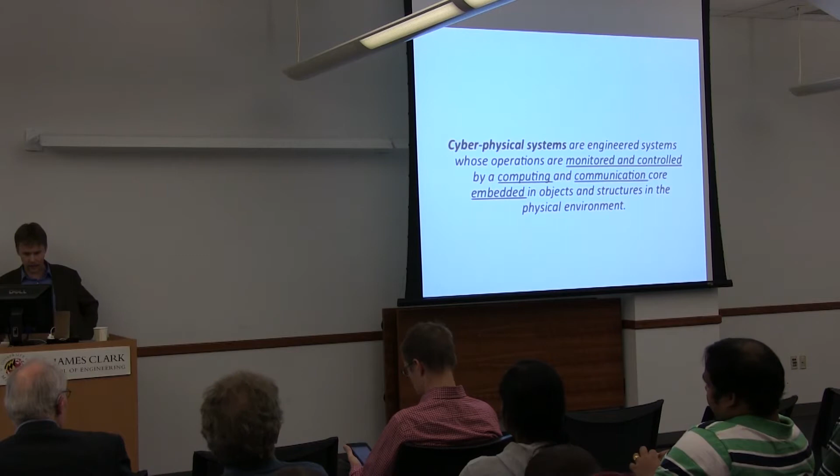When I talk about this in a more popular setting, I see it as a very natural development - coming from networking, over the sensor web, towards what some people call the action web, or CPS now. Some of the distinguishing features, I think, is that the systems we are looking into now involve infrastructures. We are not talking about small systems, we are talking about geographically large systems, closing the loop, but also the human - humans are very important in these systems.

As I said, I structure it into three parts. I will talk quite a bit on two case studies - one problem in goods transportation and one problem in building management. Then the last third will be on some cross-cutting challenges.

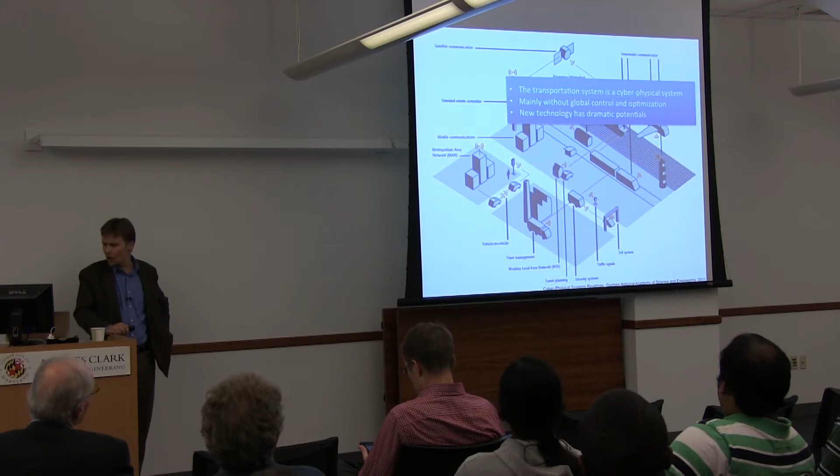But let's jump directly into goods transportation. The transportation network is a fantastic source of inspiration if you want to work on CPS, because it fulfills all these aspects of CPS. What is also excellent for research is that it's mainly without global control and optimization today - we run these systems more or less without any type of social optimum or anything like that. In addition, we have all these new technologies around that can make a dramatic potential.

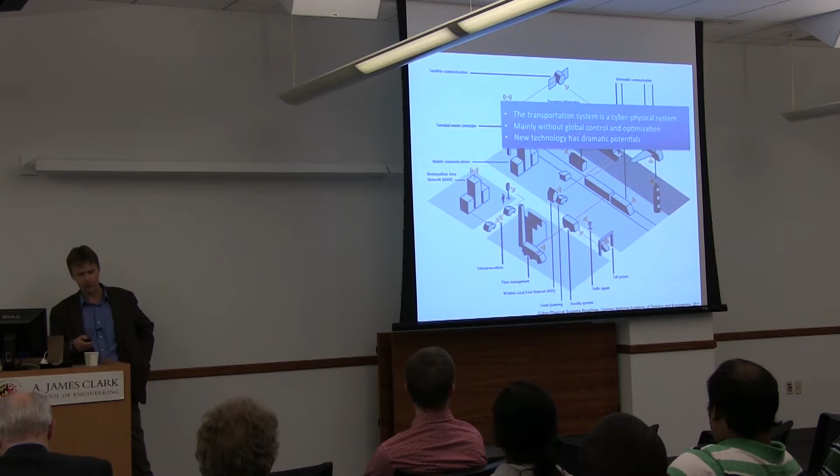But let's look not at transportation networks in general, but zoom in to goods transportation, and let's look at the demands from goods transportation. Goods transportation on the roads is actually very important for society, not only because it secures delivery and so on, but also because of pollution, for instance. As you see here, some figures about the development in goods transportation - 30% of CO2 emissions, for instance, come from this area, and there are a lot of efforts in the world trying to make this type of transportation more green.

Another viewpoint is efficiency. The figure you see down there is from Dr. Ludanek, CTO of Scania, a truck manufacturer. When he told me these figures, I was quite surprised - 24% of long haulage trucks run empty. These are Scania figures, so I guess they are quite representative. 57% is the average load capacity. So there is a lot of waste of trucks going around, where we could use some better method to improve.

Another view of this problem is to look from the fleet owner viewpoint - the one who is delivering, who owns the trucks and delivers - what do they spend money on? You see that this is basically three things. The orange part is fuel - one third is fuel. The light blue is salary - one third is salary, and then the rest is one third.

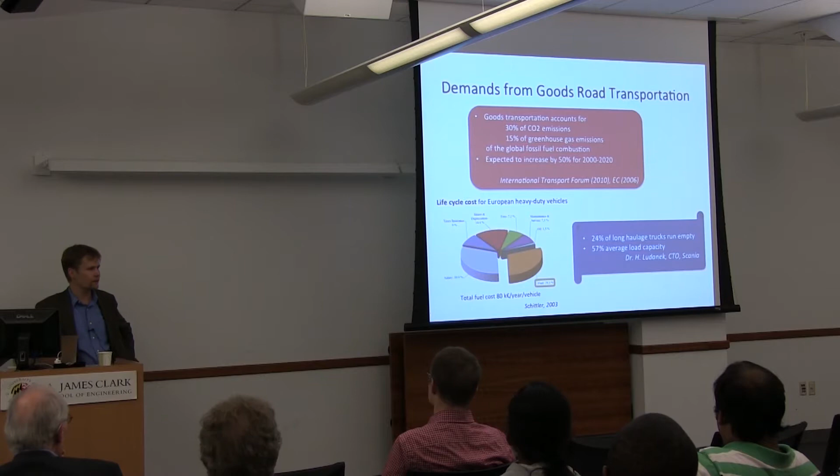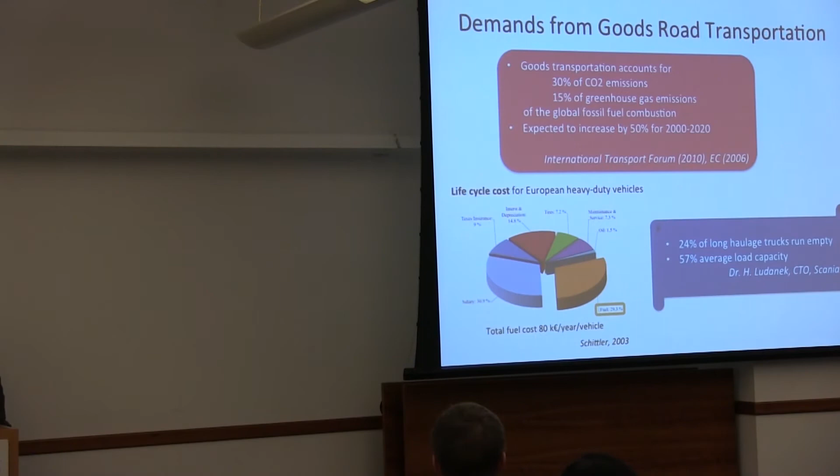This is now European figures, but I guess in the US it would probably be a bit similar. Notice that this is quite different than if you compare with cars. Fuel is not at all that important for cars, but for trucks that run 24/7, this is the fact. Fuel will be a smaller percentage in the US - it's more expensive in Europe, so the price is different.

So that was from the demand side. Let's look at the technology push - this is familiar to all of us. We have the sensor and communication technology now which is there. Today a modern truck has radar, cameras on board, vehicle-to-vehicle communication, and vehicle-to-infrastructure. All these things are more or less in place, but to what degree they are actually being integrated, used, and optimized - that's the second point, but the technology is there.

Another technology is real-time traffic information, right? This is also available to various degrees. We know what is happening on the road network. We don't use it today to optimize road transportation, but we know what's going on.

The third component here, which I would like to spend quite some time talking about, is vehicle platooning. This is something where, if you look at the control area, the first papers were written in the 60s about this. It's only recently that truck manufacturers have really taken this to implementation, and we are one of those working with it - you see this as the Scania trucks, but basically all major truck manufacturers in the world today are working on this. So let's stay with platooning for a little while.

Why would we like to platoon? On this slide you see on the x-axis the relative distance between vehicles in the platoon, and on the y-axis the air drag reduction. If you look at the second truck, for instance, at a distance of about 10 meters from the first truck, it has an air drag reduction of about 40%. That's quite substantial. Unfortunately, 40% air drag reduction doesn't mean 40% fuel reduction, but it could mean something like 5-10% fuel reduction. That's enough to be interesting to investigate.

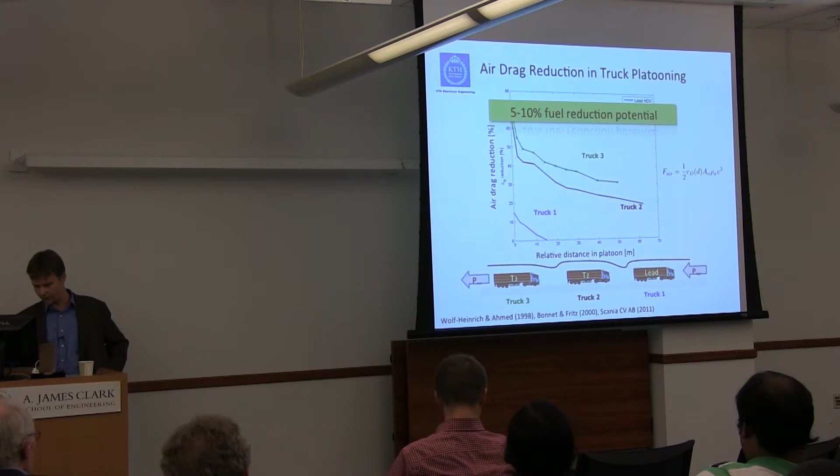So these three components I mentioned are there now. What could we use them for? Let's take a high-level look at this. We have Germany mapped here, so let's think about how we could optimize goods transportation. Goods transportation is moving goods now between these cities - what is the situation, roughly speaking?

In Europe we have 2 million long haulage trucks, in Germany 400,000. So it's basically a large distributed control system. We could think about that as more or less like a network flow problem, or an optimization problem, which is maybe not so interesting if we just solve it from scratch, because we could not start from scratch here - the situation is that we already have these 2 million trucks. So we need to come up with techniques which allow us to optimize, but don't do too much harm - don't completely change the way we are running the systems.

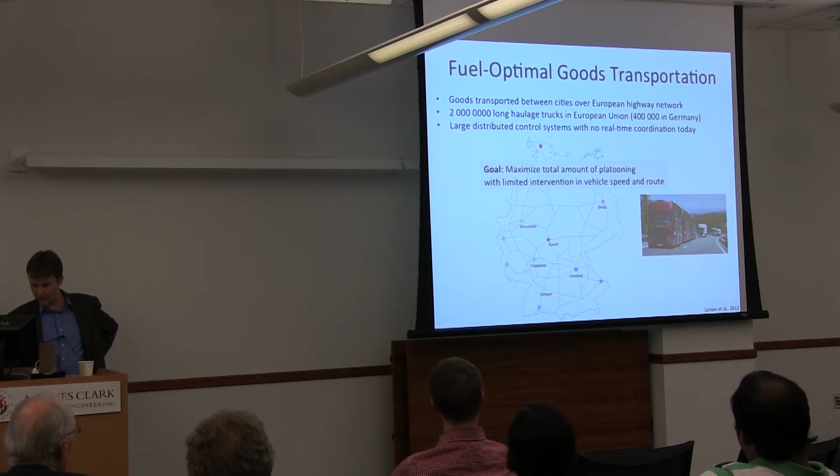So this vague goal I put up here, and I will discuss a little bit around that: how do we maximize the total amount of platooning but still limit the intervention we make now in the transportation that is going on? If you were to solve this problem, you might come up with something like I'd like to show next - some sort of functional architecture for how to solve that problem with these components I talked about.

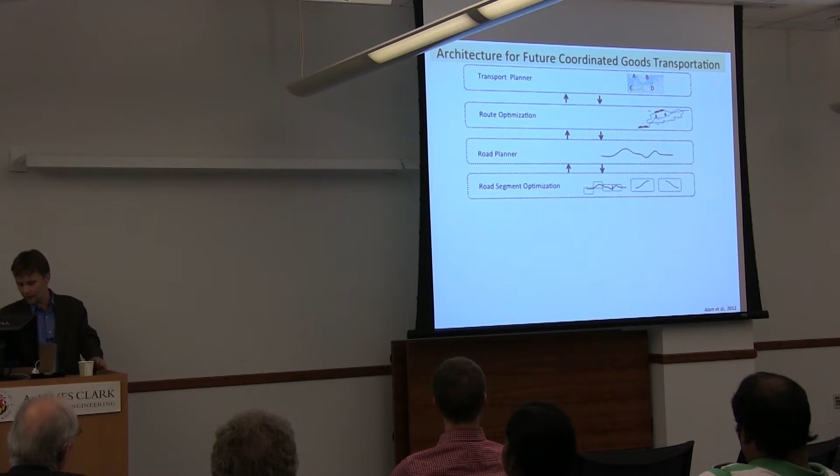When we've solved these problems from the top down, we come to the level of individual platoons, how they are formed, how they are split, how they interact with other traffic, and so on. Coming down one level further, what we need is to control a single platoon in real time. The last layer is then how we control the individual vehicle.

Now there's an interesting difference if you compare this work with the PATH project in California in the 80s and 90s. The implementation here is within the advanced cruise controller. Think about how the cruise control in a truck is already quite advanced today - you set a distance to the car in front of you, and you have a radar that regulates and measures the distance, etc.

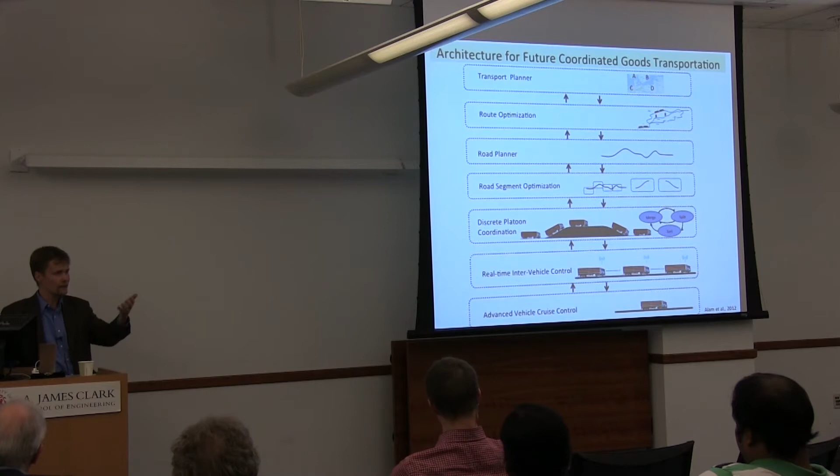So here you would imagine an interface where the driver can swap and shift to some sort of platooning mode, and then there's some automatic execution going on. This is, for legal and other reasons, an important aspect of these systems.

Let's now look a bit at what we've been doing, and I'll do some snapshots in this architecture of solutions to the problem, starting from the bottom. If we are to drive a single truck in a fuel-optimal way, how should we do that?

The first thing we can prove from optimal control technique is that if we're on a flat road, we should just go at constant speed - we shouldn't do anything. So the interesting thing is what it looks like in the picture here. We need to know the road ahead of us, the road grade and so on, and then we can adjust the driving according to that.

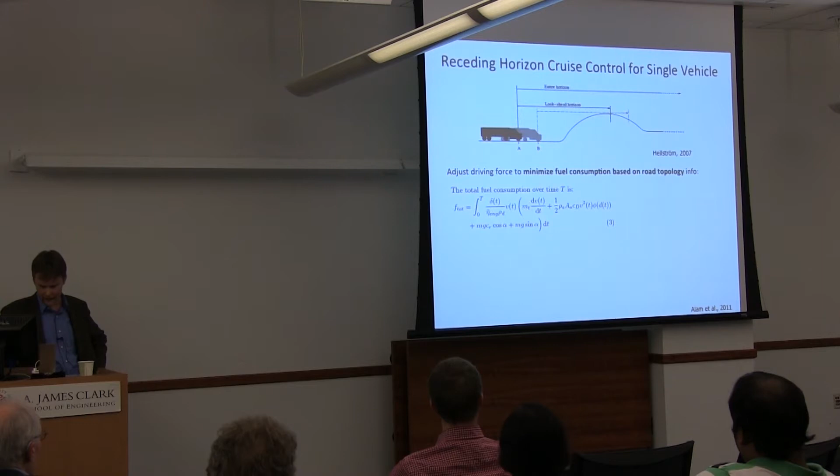We formulate some sort of a cost function which is basically fuel cost - what the fuel cost would be for a single vehicle, which depends on the alpha, the road grade, the air drag, etc. Then we have the dynamics, which we just get from Newton's laws of physics, and you see again that it's very basic.

We have the drivetrain, which gives us some force, F engine. We have the braking force, FB. We have the air drag, FAD. We have the rolling resistance, FR, and we have the gravity, FG.

What makes this problem interesting for a truck but not for a car is that the truck could weigh 60 tons or so, which means that when going uphill compared to flat, the forces acting against us switch from being air drag and rolling resistance to being gravity. So we basically have a switch in this equation, and then we can solve the optimal control for that.

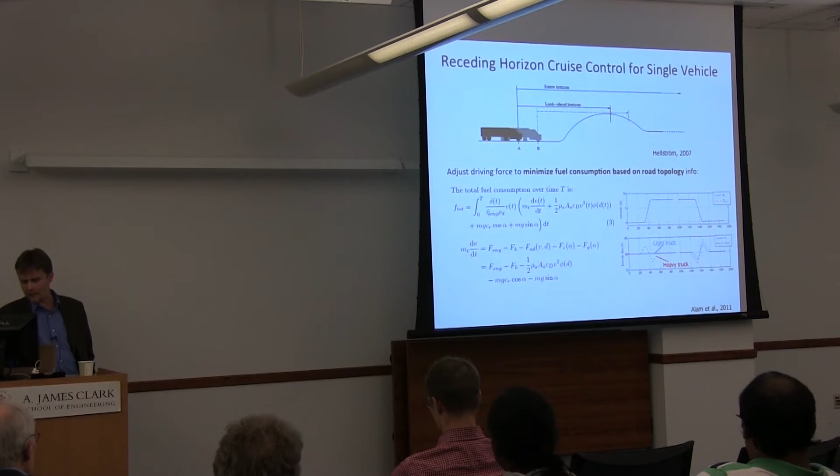This has been done and implemented - if you buy a Scania truck today, you can get this feature. Of course, they don't call it receding horizon control; they call it eco cruise control or something like that. The feature is also very reasonable for the driver, because if it's a light truck and not too steep, you just go at constant speed. But if it's a heavy truck, what happens is something drivers already do today - you speed up a little bit before going up the hill.

And then when you pass the hill, you then go a little bit slower. This is a very natural thing, but now you do it in an automatic way. And remember, everything here is implemented on the velocity reference, so it's implemented in the system as you would expect the cruise controller to do here.

There is something needed here which is not readily needed today. What is that? For this system to work, I cannot just implement it and run it like this. There is some piece of information missing in these equations. What is that, John?

No, there is no communication needed, but there is a variable here that is needed. What about the weight? No, the weight - today these trucks estimate their own weight continuously. They don't do it very well, but they have that estimate. Wind? No, wind is not it. Is there a car in front of the truck? No, but it's what I was talking about. It's alpha, the road grade. Oh, you said the grade, sorry. No, I didn't say it, but I was thinking it.

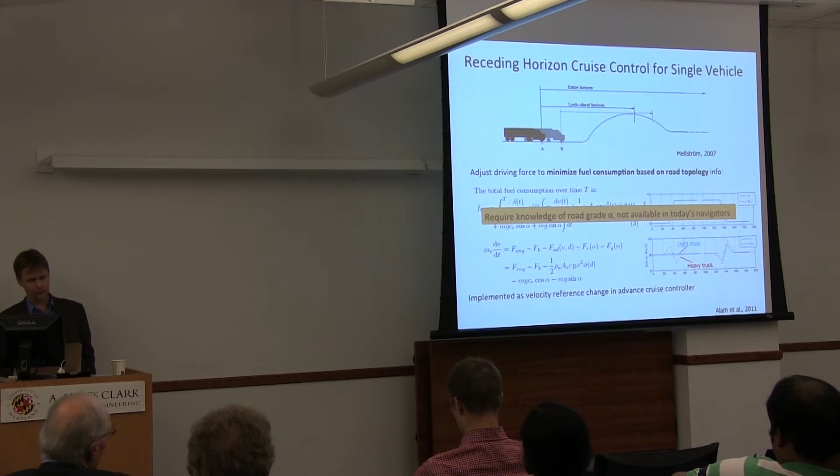So the road grade - if you think about your navigator, you don't get the road grade out there. There are companies like Navteq and others out there measuring road grade, probably in the US just like in Europe, and they sell that. When we worked on this project, we asked this question: why do you have to buy this thing? And could you actually get the road grade yourself?

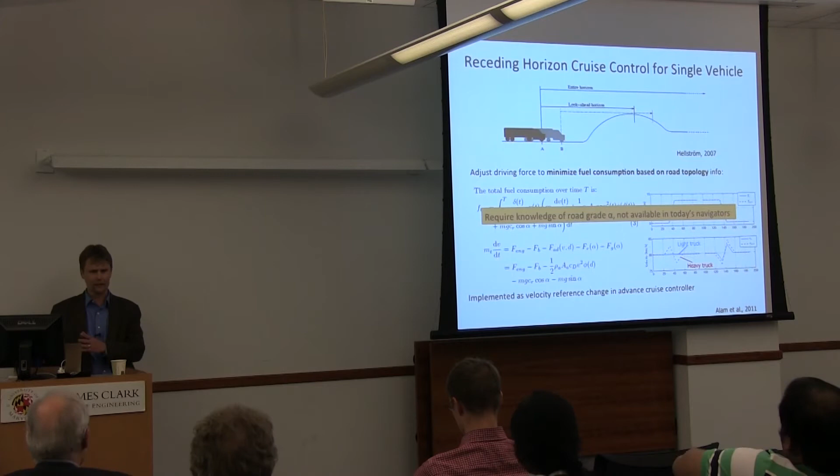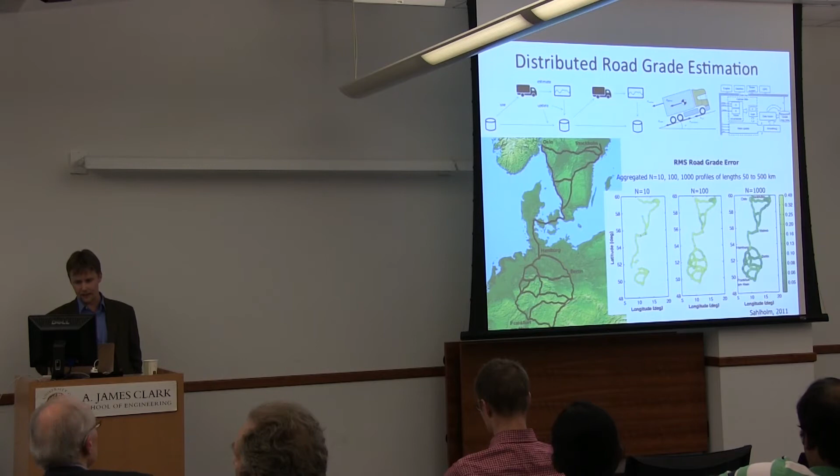So that was a little bit a separate thing, just to remember that we need the road grade. So if we have the road grade now, and we know how to plan this for a single truck, we need to also be able to do it for a platoon. Again, for the platoon, the difficulty is when we go up a hill, and this is a little bit more tricky. As far as I know, no one has found the truly optimal solution here.

Let me explain why it's difficult. As you see in these equations, the air drag depends on the relative distance to the vehicle ahead, and also to some extent to the vehicle behind. So think about an individual truck in this platoon - should it follow its own optimal trajectory, or should it stay close to the others? Or is there some sort of trade-off?

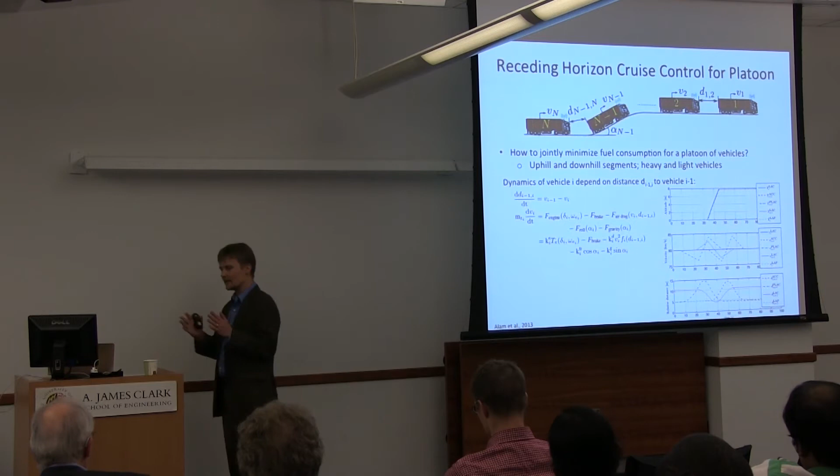We have been looking into this problem, and there are different solutions, different strategies you could say. Should you accelerate a little bit before? Should you allow the distance between vehicles to be smaller for some time and then increase again? Or should you try to make the distance bigger before the hill, and how should you do that? That's an interesting problem, and we have come up with some heuristics and run some tests, but in general, what is optimal here is not known.

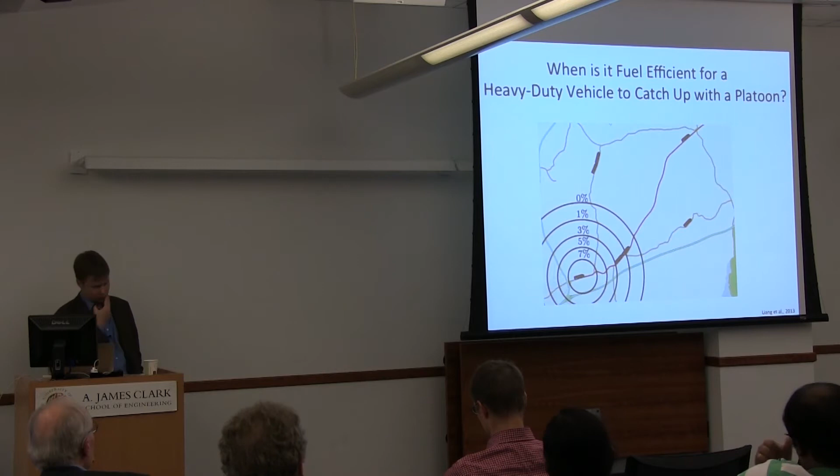Let's continue with another interesting problem: how to form the platoon. With this picture, we want to illustrate how an individual driver already out on the road might think. You could imagine that I think about who I should catch up with, and that would depend on where they are going and what distance they are from where I am. Everyone goes more or less the same velocity, but otherwise that would also be a parameter. You could imagine that you might benefit more if you catch a platoon that is closer rather than one that is further away.

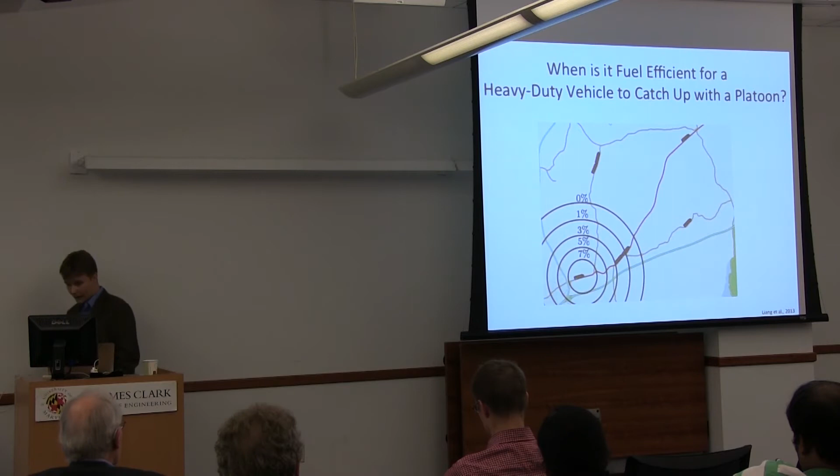Before talking more about the higher-level issue, I want to show a couple of brief movies to see how things are doing. There will be two different things: one will be how the communicator at Scania sees this, more like a professional production, and then I'll show some of our experiments. There is no sound, but it's just an illustration of this concept.

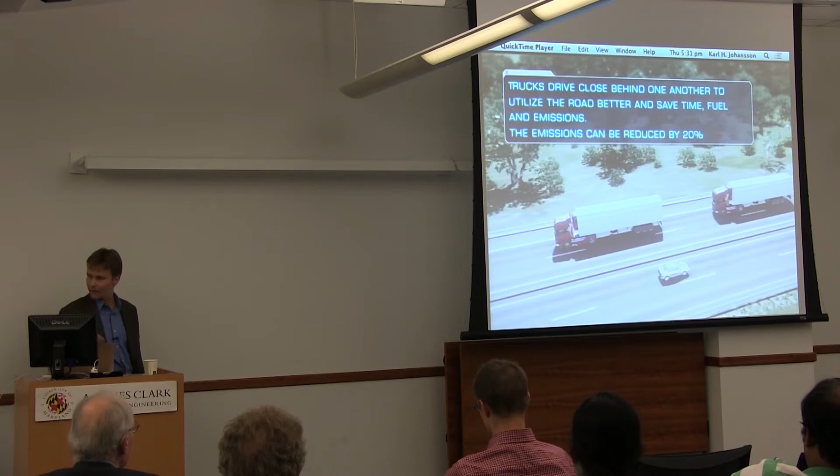So you have the trucks out there, and the trucks are forming these platoons as they go, communicating back and forth to keep that short distance I talked about. A question that comes up is what this distance should optimally be. We have some ideas about that, and we have run wind tunnel tests.

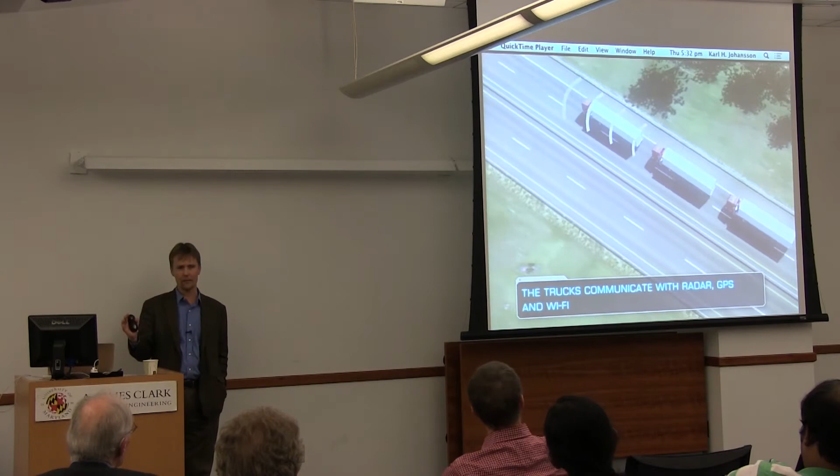Something important here is safety, and other drivers—this, I would say, is largely an unsolved problem so far. How to be able to do exactly what is happening there, or imagine it's not a car but a motorbike, and how should you detect this. There's another scenario when a truck will be leaving the platoon, but imagine also there's an on-ramp. This automatic lane change, where everyone follows automatically, is a quite challenging task to show in reality. This is somehow the view of what this system is supposed to be doing.

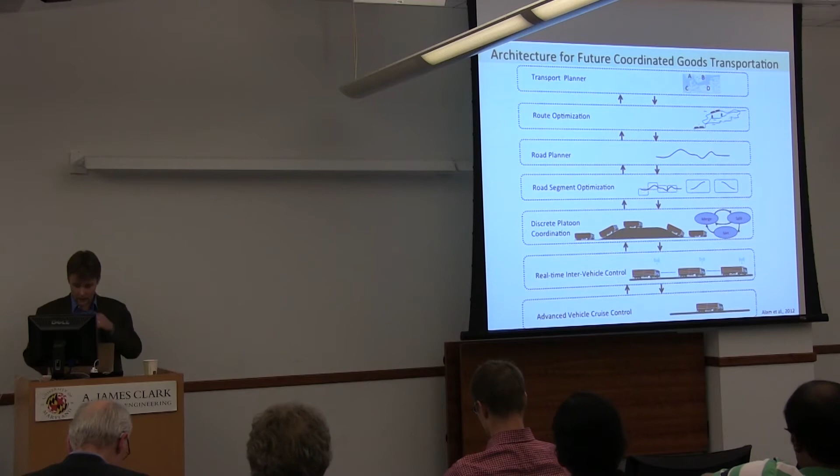Let's move up in this hierarchy now and come back to the high-level problem of optimizing goods transportation. We say we have this platooning technology in place. So basically what we can think about is a snapshot of Germany now, of the Autobahn system, with trucks around.

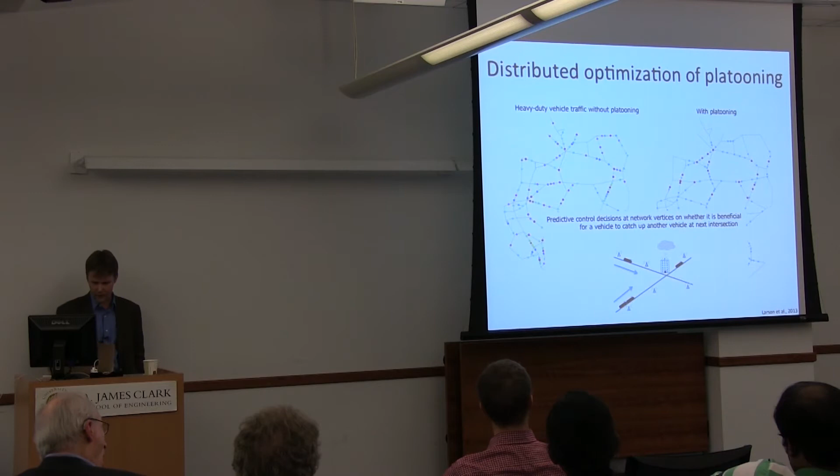One thing one could think about here is what if we took these trucks and while they are driving, we suggest that some should merge and go in platoons. So basically implement something like you see in this picture. We suggest intersection points where highways merge in order to optimize maximum platooning. In a particular situation you could end up with something like this, where some are platooning and some are not. And at each junction or intersection there needs to be some intelligence that predicts when a truck will be at this intersection, and who should speed up or slow down a little, because you cannot interfere much with the cruise controller in order to meet perfectly at these intersections.

So let's say we were doing this. Would this solve the problem? We showed some simulation and experimental data. First the simulation: let's say we take 300 trucks over Germany with random starting points and destinations in German cities, and run 500 experiments. How much would they save by platooning? Most of them, or the mean, is something like 2.2%. We assume that if they platoon, they save 10%, but on average there is a saving of only 2.2%. So not very much, but this was with 300 trucks.

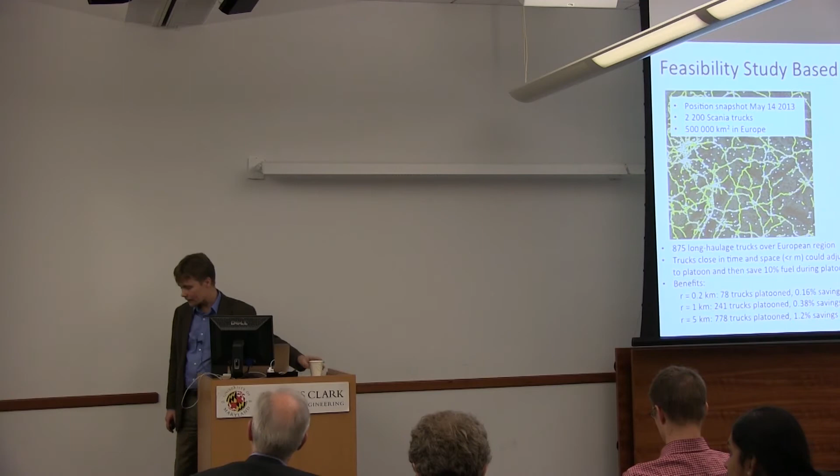Yeah, I think very much so. There's no details in this which had borrowed, I would say, from air traffic management or logistics. But there are definitely intersections on how problems are solved. I think maybe a difference I see is that in this business, even if truck manufacturing has a few big ones, and fleet owners, there are a few really big ones like DHL, Schneider, Schenker and so on, there's also a lot of those who have maybe 5 trucks, 10 trucks, 50 trucks, and they are very important in this picture, how to integrate them and how they would benefit from that system. So that might be different from air traffic, I think.

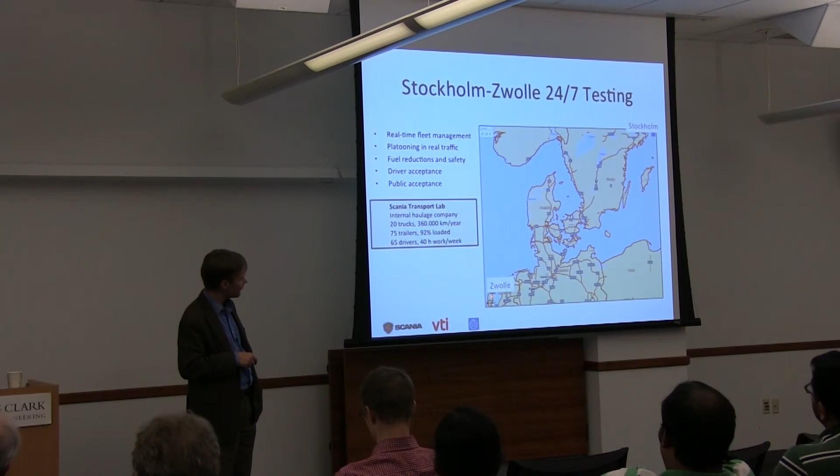Something on the other testing. So since a bit more than a year now, we are running tests between Stockholm and Zwolle, a city in Netherlands, running this 24/7 with truck drivers. So you see here there is something like 20 trucks and 65 truck drivers, also studying their experience of these systems and so on. I won't dwell into the results, but as you can imagine, some of this goes into the acceptance of the technology. This has also been covered in the news and so on.

Okay, so with that I would like to switch to, this was the first case study. I would like to switch to the second, while I understand it may be tough depending on how many questions John asks now in the next section. So let's talk about building management.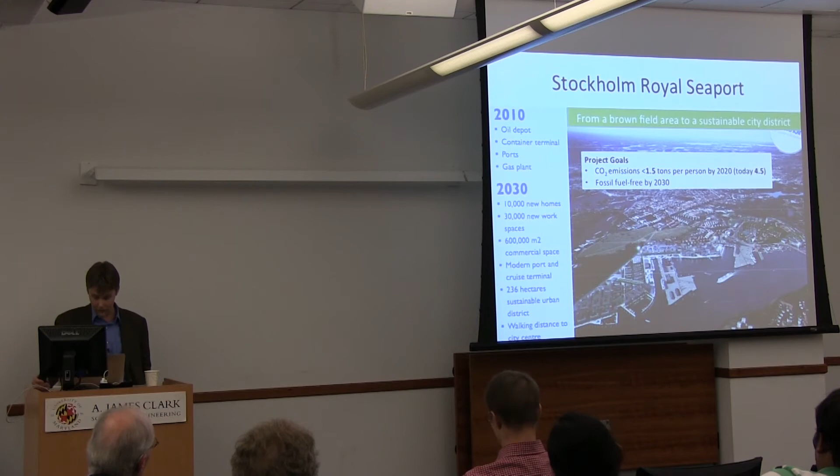If you are coming for the Nobel Prize, you don't get it there, but down there. But they have their building close to KTH. But this is not what I put in this picture. There is a sustainable city district being built, and people are moving in right now, which is called the Royal Seaport. And that is over here, where this picture shows a harbor, and this is what it's being turned into. And this is, we talked about Clinton's initiative earlier this morning. So this is part of this Clinton Green City initiative, and there's a lot of constraints on the CO2 emissions in this city. So we are involved in some projects related to this, of how to do more energy efficient buildings. And this picture about energy consumption, you are probably all familiar with, that buildings is a substantial part.

In Europe, 40% of total energy is used in buildings. And notice that 76% of building energy is for comfort. So it's a lot. Are we doing this the right way? There have been general studies showing that with information and communication technology we can improve this a lot, so there's a lot of potential here.

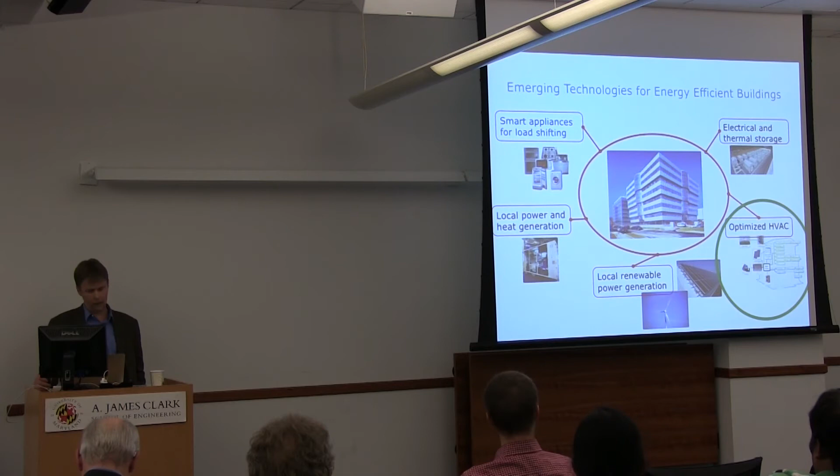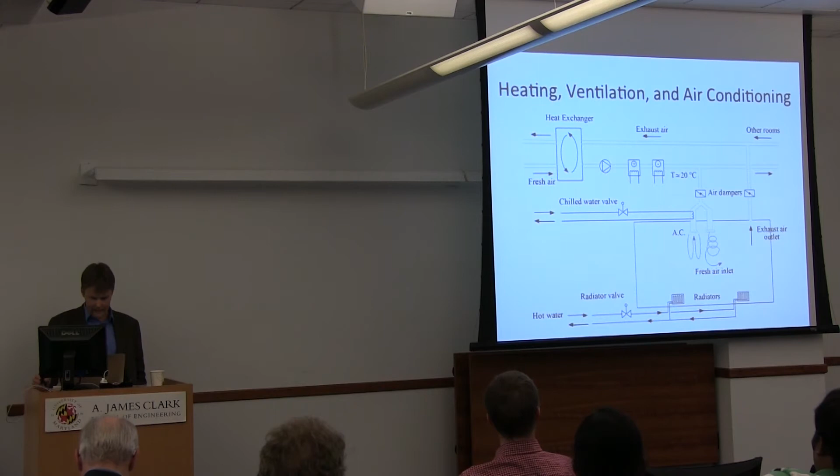When it comes to making buildings more efficient, there are different technologies being developed and different works going on. I want to focus on one piece we've been working on, which has to do with HVAC, optimizing the HVAC system. HVAC is heating, ventilation, and air conditioning. The classical control problem, you can say, is nothing but an optimal control problem: you want to reduce the energy used while keeping the building in good condition. Keeping good condition basically means keeping two variables within constraints: indoor temperature and air quality. So this is what we're dealing with here.

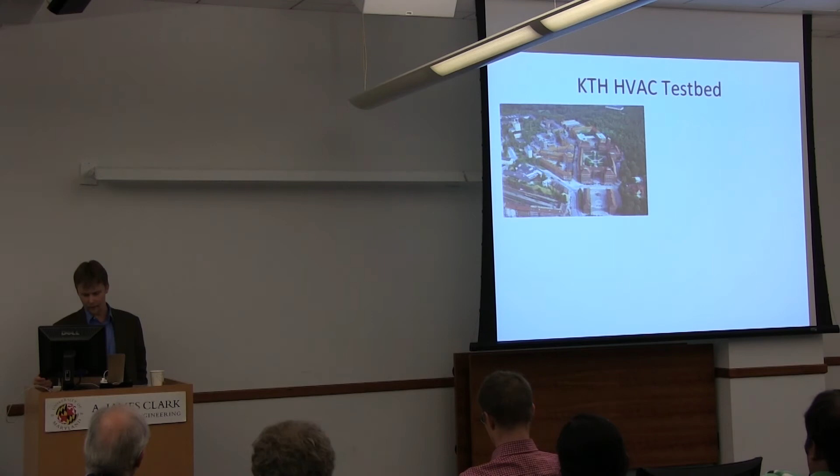We started working on this a few years back, and when we started, the first thing we realized is that we are inside a building. So we started to develop a test bed to understand this better. After quite some work, we got access to the whole SCADA system, the whole control system of the KTH campus. We have access to that in our system now, and we're located in the EE building, which looks like this.

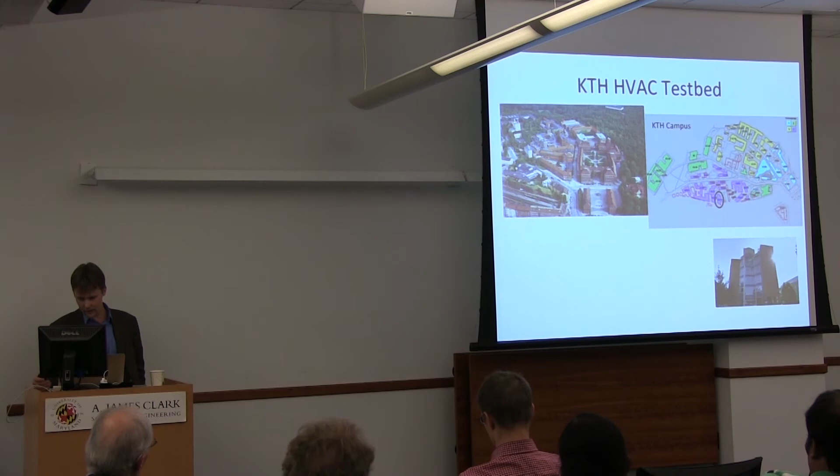In one of the floor plans there, we've worked a bit more actively in changing the system. This floor plan is a basement of the building where we have some labs, a lecture room, and so on. If we look inside one lab, it looks like this: you have a room there, and it's a student lab doing basic control courses with the double water tank processes and so on.

As I said, you have some actuators, which are the traditional ones. You have air coming in that is heated or cooled. You have hot water coming into the radiators. And you regulate also the fan speed, controlling what air comes in. And you have some sensors, the CO2 and temperature sensors.

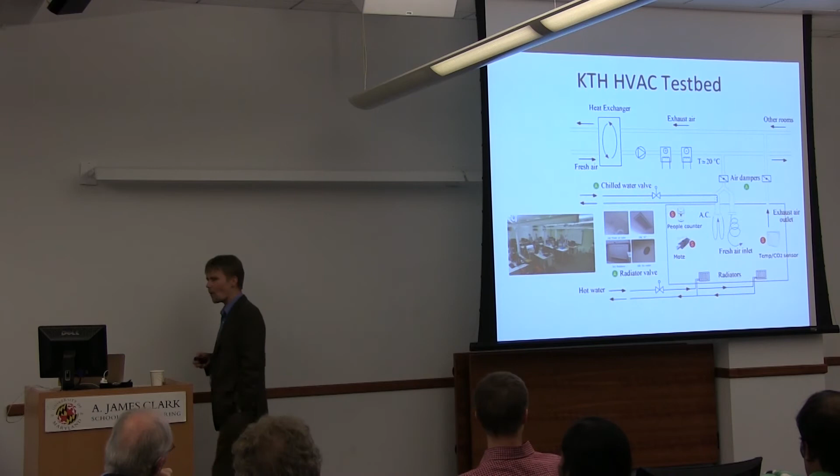But what we also did here is include some more sensing. The type of sensing we've included is like a people counter and so on, a weather station. But also thinking about information you can get from outside, like occupancy schedules and so on. So this is being integrated here.

Of all these things, the toughest has been the first line. We actually got a PLC integrated into the real system. It was not easy to get all the permissions, and I don't think we really have all the permissions, but anyhow, we have a system running there. It's actually available, so if you're bored by my talk now and you have a smartphone, you can go to this homepage and read online what's happening in this room right now.

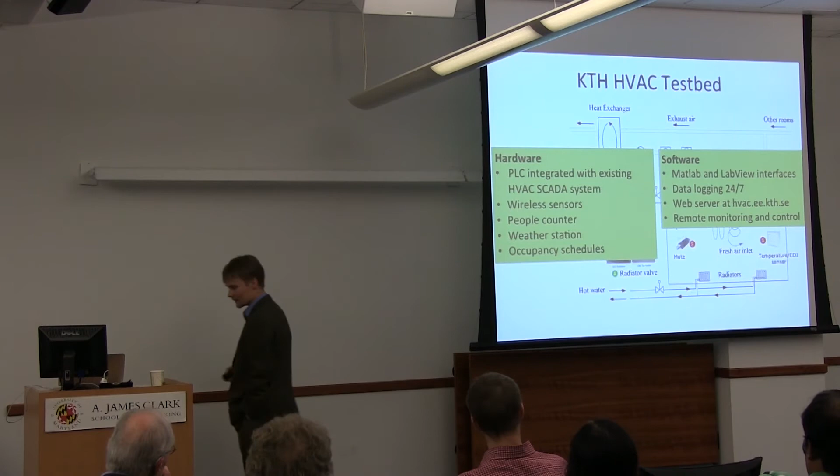I'd like to say something about the control we're developing here, and the control architecture. We've been developing a new control architecture for this HVAC system, which on the low level has the existing PI controllers. As I said, we're regulating the air flow, the supplied air temperature, and the temperature to the radiator — these are the control variables. We're measuring basically the CO2 concentration and room temperature.

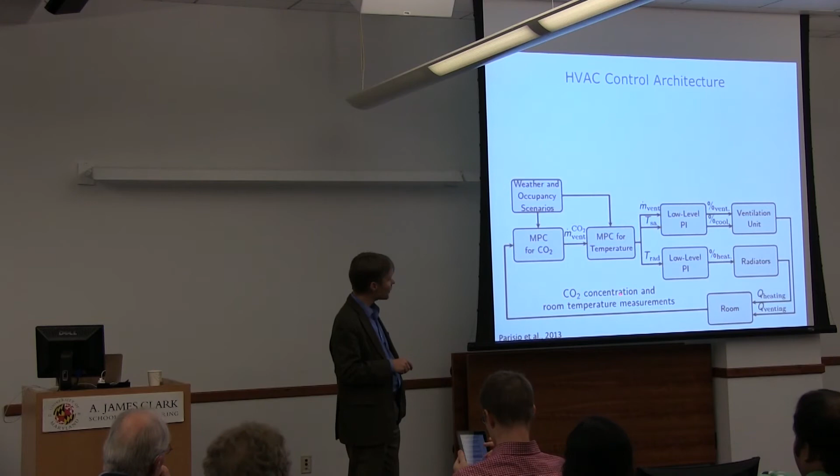What's new here now is this other type of information we get in, like the weather forecast and things like that. That comes in, and the way we integrate it is through scenarios — what we've been developing is scenario-based MPC. We basically have an architecture where, first of all, notice there are two different controllers here: the temperature controller acts on these variables, while the CO2 controller only provides a minimum airflow that is a constraint to the temperature controller. The CO2 is more like, we view it here, you can argue if this is the best way to do it, but we view it as a kind of minimum that you compute.

And then into these comes now the models that we have of the weather and the occupancy. I want to talk a little bit about how these are being integrated. Some of you have maybe seen this about scenario-based MPC, but if not, I will say a few words about that. But before that, let me just show you something which has been very important.

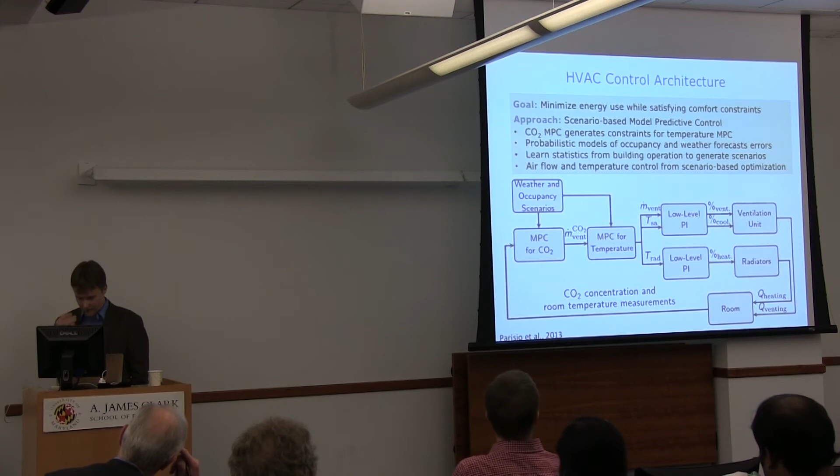Of course, to do the control, to design or tune this controller, models are very important. When I started this, I was a bit naive. I thought we go to a textbook on HVAC, write down the model, and that's it. But it's actually taken quite some time to get models on the level that we can use here. Of course, here it looks very simple, just linear models and so on. But these models that we derive are a mix of physics-based and system identification type models, right? Or gray box models, if you want.

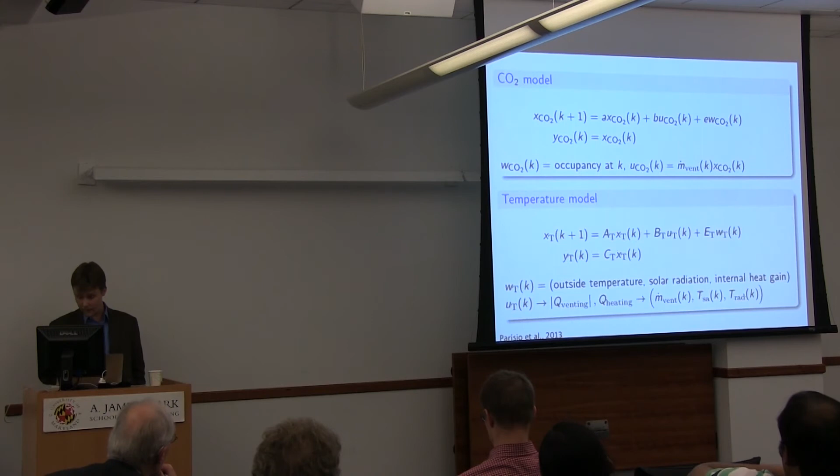The same with the temperature MPC. Similar, right? But different equations. In this case, it's thermal comfort. We should, with a certain probability, be within this range.

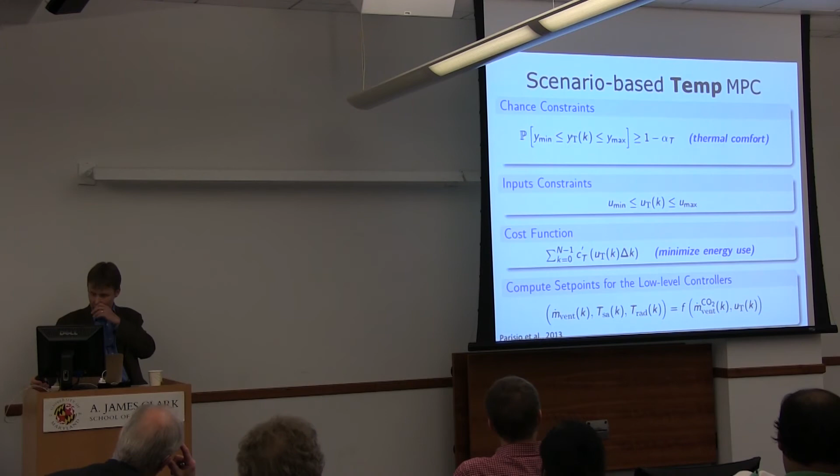So how do we now go from the chance constraints to the scenario-based MPC? One way could have been to stay in the stochastic world and do a stochastic MPC, but we don't do that. We do a robust approach instead. So we translate this chance constraint into deterministic constraints. And how do we do that?

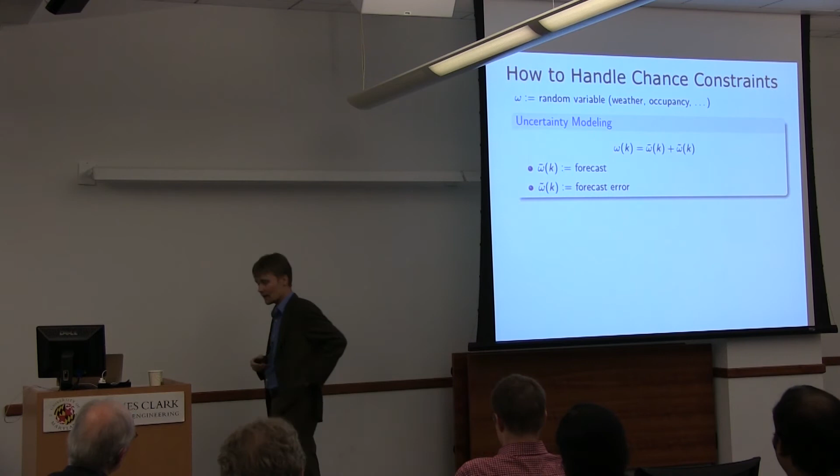The way we do it is that for one of these disturbances, let's say the weather, we see that the weather into the future has two pieces: one that we can forecast, and one which is a forecast error. With these types of things like weather, occupancy, and so on, assuming it's Gaussian is not a good model. So that's why we are using this approach. We try now to come up with other types of probabilistic description of this, which comes from, could be like a mix of Gaussians or other types of underlying probability model that could be learned during the operation of the buildings.

When we have that, we can generate scenarios, and there is also some theory developed by Campi and others of how many of these scenarios you need to put into your system to compute this robust controller, in order to guarantee with a certain probability that you satisfy these probabilistic constraints. So you see that in the end you get some sort of robust formulation of the MPC.

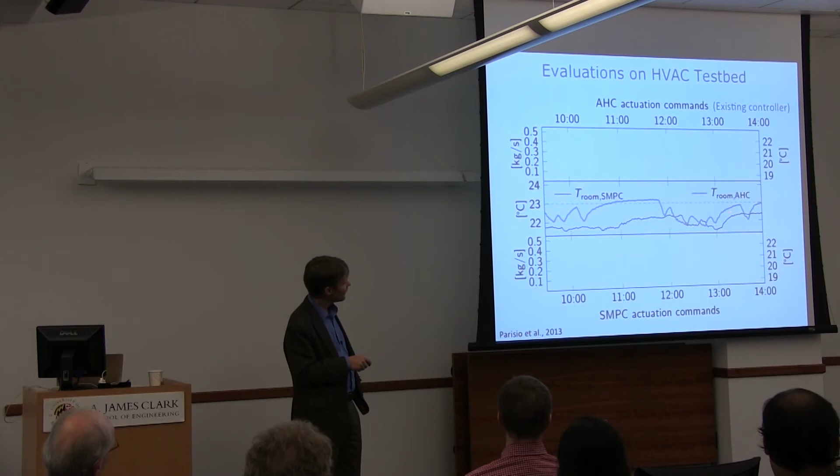So how well do these controllers do now? On the middle plot here, the gray line is the existing controller. The existing controller is able most of the time to keep it within the comfort range, which is 21 to 23 degrees here, but it exceeds at some point. And so the new controller here is doing a little bit better.

This is the control action, and there are two types of control action shown here. One is the supply air temperature, which varies here a little bit, and the other one is the airflow. You see the airflow is more or less bang-bang, right? Either it's on or it's off. It's not per se bang-bang, it's not a discrete variable, but this is the case here.

In our case, you can see that what the MPC is doing, what is a bit different here, is that it's more active on the temperature of the supply air. And this is what does the job.

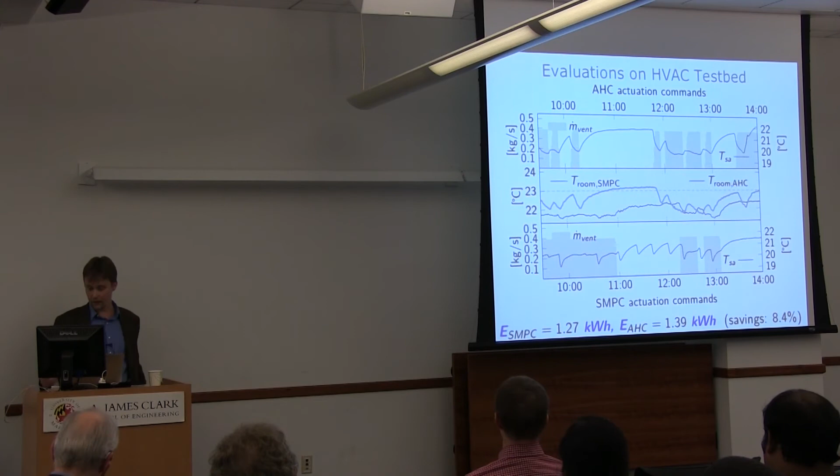So how much do we gain by this? We gain something like 8% better than the existing controller. If you look at the absolute number there, you would say, why caring? This is extremely small, right? But remember, we're talking about one room during 4 hours, a summer day in Stockholm. So I mean, this you should view on a bigger scale.

Okay, so that was what I would like to talk about in the building management. And for the last 10 minutes, I want to talk about some of the cross-cutting topics. You will see if you think it's cross-cutting or not. Okay, so let's go back to the cyber-physical here.

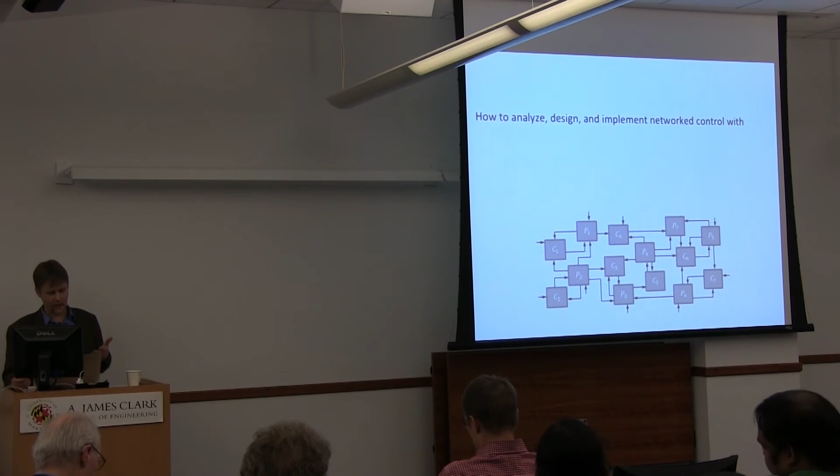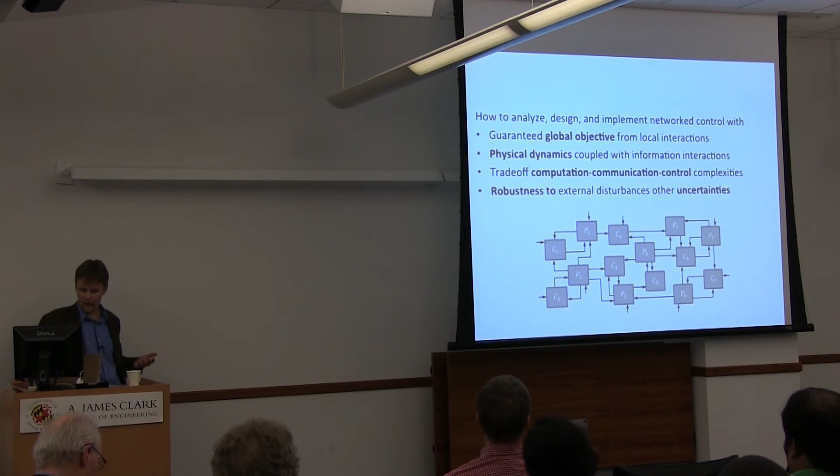In the control area that has been considered quite a bit, right? One type of problems, we sometimes draw a block diagram like the following, where we have a lot of different plants and a lot of different local controllers that are now controlling the system, and we ask ourselves, how can we develop control for these type of systems when we now have this type of demands on the global objective, on the dynamics, restrictions on what we can compute, what we can communicate, and so on.

A particular class of problems are the ones being dealt with in decentralized control. So in decentralized control, we focus into just saying that we have some plants given here. We know the dynamics of P. And then we will have a method to find out what are good Cs. And since 40, 50 years, people have studied that problem.

But I'm not going to talk about that problem. I'm going to talk about what I think has been studied too little. And that is that if we now think about that block diagram and relate it back to some of the applications I talked about, who gives me these P's, right? So the classical theory assumes that we have information about the P's, right?

And I argue that these are not so easy to get in general. It requires quite some effort, like that Rome example I showed you. So what if we should design, for instance, C1 in that picture only based on information about some of these P's? How should we be doing that?

Or if you want to ask that same question on the platooning example. So let's say that we have a three vehicle platoon here and we want to regulate the inter-vehicle distances. Should I now communicate the mass between the vehicles or not? How much benefit is it in communicating that?

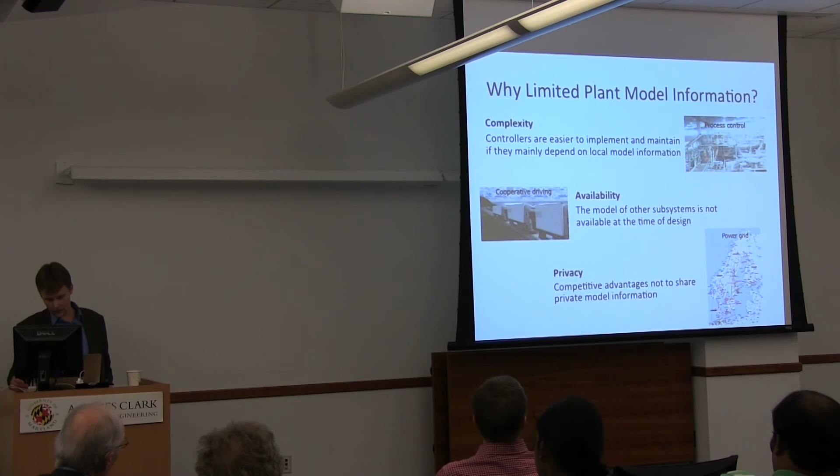So let's try to put this problem into a networked setting. With a network setting, I mean a traditional network control system where we have controllers K and plants P, which interact as I draw there with the arrows. I will use graphs now to show the links here.

So I have something I call the plant graph, which just shows what subsystems, what sub-Ps here, are interacting with which. I have a control graph which illustrates what the controllers can do and what information the controller has. And then I have the new thing, which is what I call the design graph.

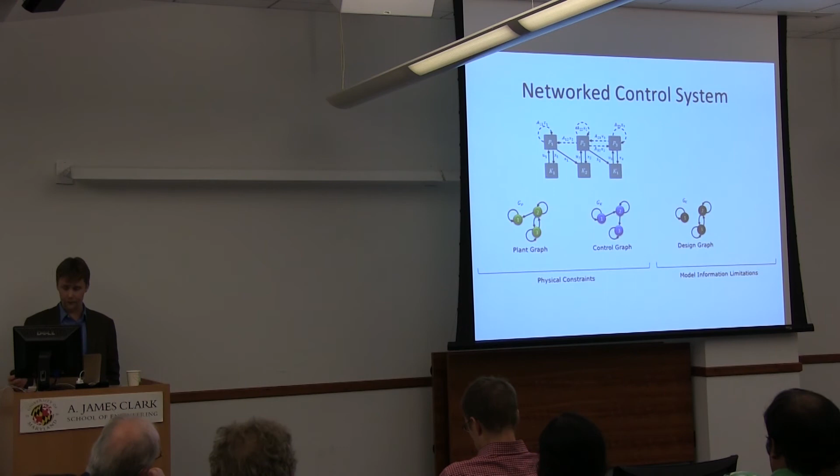So when I design each of these controllers, there could be different amounts of information available about the plant. Like in this picture, a self loop here means that when I design this controller, I have only information about P1, while for the others I could have more information. So this is what I mean by having these model information limitations.

So let's very quickly put some linear systems notation on this. We say now that P is given by a linear system, and that we have a structure given by that plant graph for the plant. That puts some structure, given by the adjacency matrix of that graph, on the A matrix of the overall dynamical system. And we have a B matrix that supports this.

Similarly, in what I'll show first here, we'll say that the controller is just a static state feedback controller. Again, the controller then has a structure given by the control graph, which gives some structure on that matrix K in the control. The design graph now—the design is a map from the parameters of the system, so from A and B, to a controller K. And the part of A and B you can use when you compute K is restricted by that design graph down there.

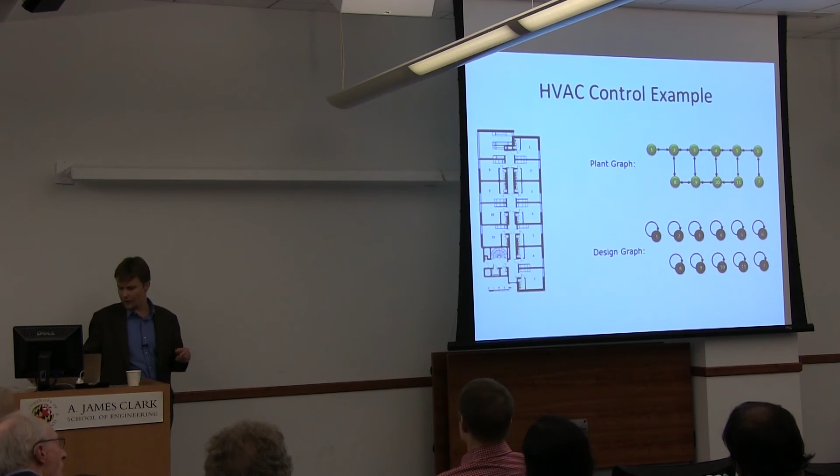So for instance, in this particular case, you see I would have a design graph which looks like this. Why would this be reasonable? If we look back on the HVAC example, you have a floor plan. You can imagine that the different rooms interact through the temperature with rooms next door, while in the design graph it could still be so that I design the local controllers only based on the information I have of the dynamics in that room.

How can we compare performance of different design strategies, or design methods gamma? We use the concept from computer science called the competitive ratio. I basically compute a cost J of this gamma of the design of A, B, and then take the supremum—the worst case of all the plants I have—so I get something there. Then I normalize that with the best possible thing I can do, the K star, and get a quota out, which I call R, the competitive ratio.

And then I do that for, in this case I have a linear system, I will do that for a quadratic cost, and I notice that if I have a complete graph, so I used state feedback where I used the full K here, then of course the best thing we can do up there would be the usual optimal LQ controller, right? So with that notation we have come up to a problem formulation.

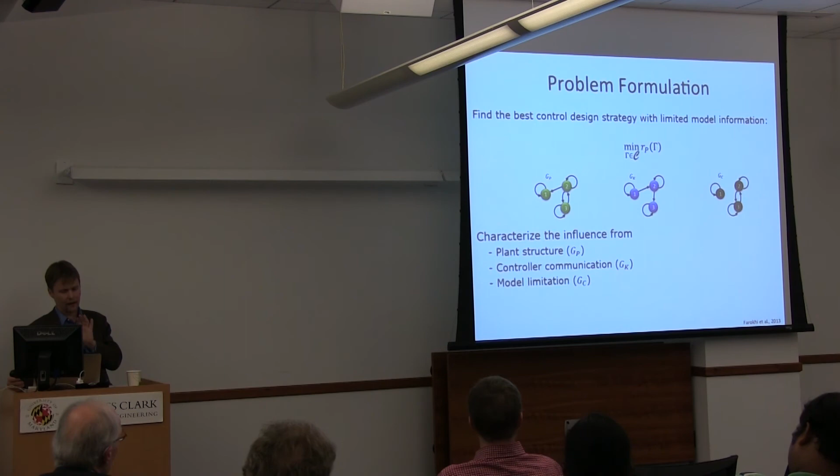So the problem I'm interested in here is now to find a good control strategy that minimizes this competitive ratio, given that we have structural information about the plant, about the controller, and about the information available. And I would like to understand how these different graphs play a role here.

There is some assumption in the result I'm going to show. The most important is the first one. The particular thing I'm showing here is for a fully actuated system, which is of course a strong limitation, that one can do some extensions here. Notice that the first example I showed you, that we came up with a deadbeat, and that deadbeat also fulfills this condition that I put on the design information.

And what is interesting in this network setting is the following result: the result of Langbort and Delvenne extends to this setting of networks if a condition is fulfilled, namely that the control graph needs to be a supergraph of the plant graph. What does that mean? It means that it has more edges than the plant graph, so in some sense it means there needs to be more communication in the controller than in the plant graph.

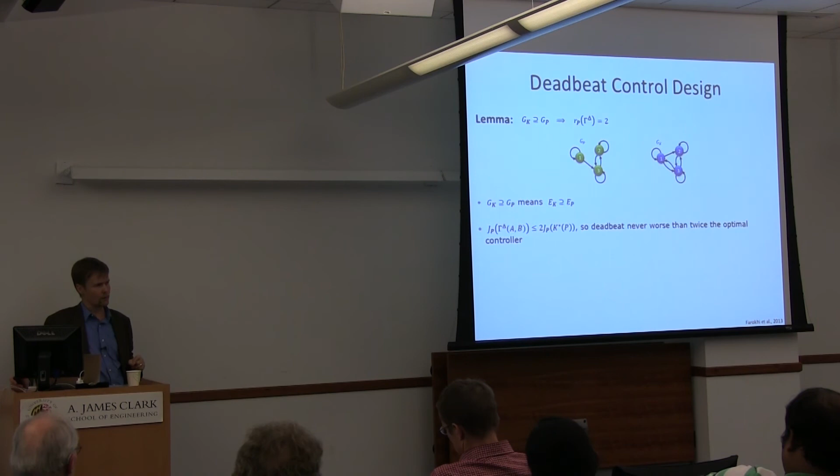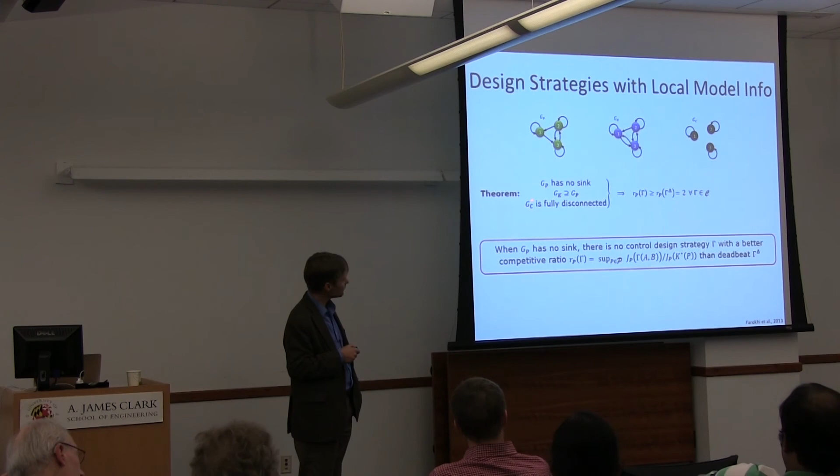So if that is fulfilled, it's still so that the deadbeat controller is never worse than twice the optimal controller. That was for the deadbeat. The interesting thing here is now that this holds for any design strategy in this setup. So it doesn't matter what design strategy you are looking at, as long as you look at this type of state feedback. As long as in this case the design graph is fully disconnected, you can never do better than that.

And as you see here, I talk about sink, but in the other case you have to go a little bit further. But I will skip that example.

Let's come to the conclusion, so we have some time for discussion here also. What I tried to convey here today is, one thing was about this CPS architecture. I think there are some open questions about how this architecture should look like, and just working with a couple of application domains, you see that there are some similarities on how we, from a control, communication, computing viewpoint, would model this system, but it's not at all settled, right? I talked a little bit about local plant models and global performance.

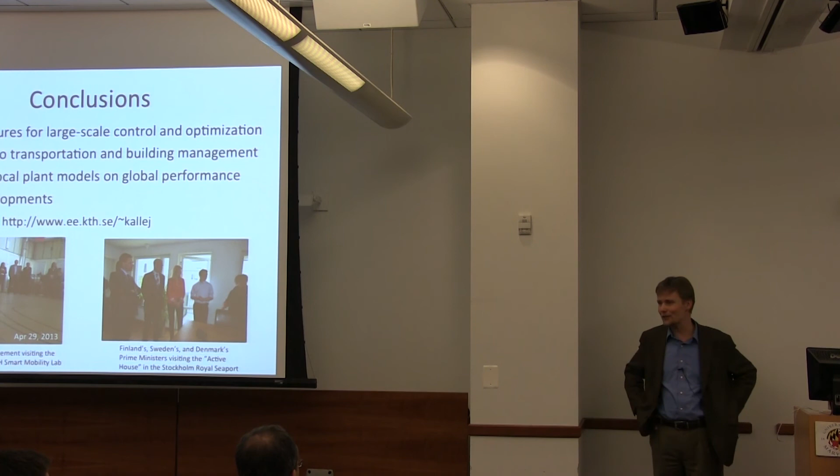If you look at the building case, I work with people from building sciences at KTH who develop tools like Simulink or Energy Plus, which can do certain things very well. Other things are much harder, like implementing different types of controls. So we try to work with them to understand how to come from these different domains and simulate things together.

So in your building case, did you do this experiment across seasons? Is that efficiency consistent across seasons, or was that 9-10% just an average?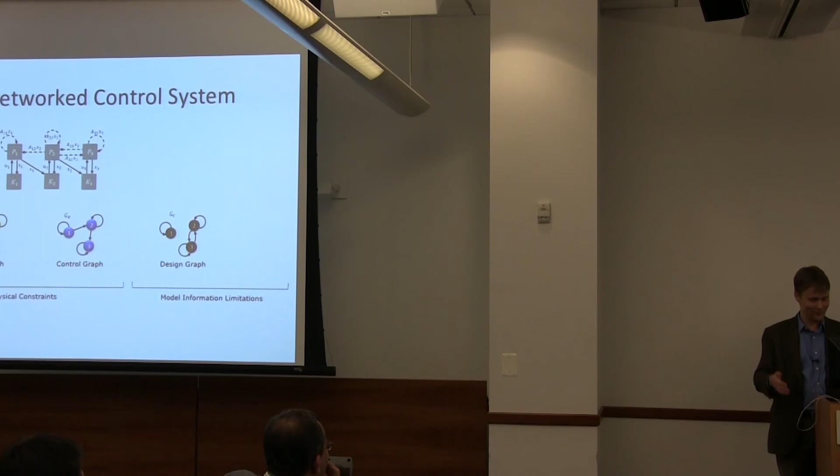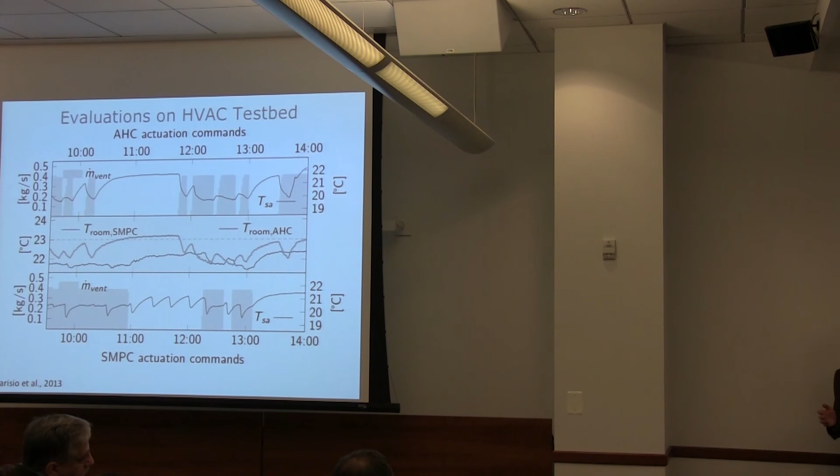That's a very good question. Let me ask myself one question you didn't ask, because if you think about doing this during one day, say between 10 and 2, and then comparing my new strategy with an old strategy - how did you do that? Because it's one physical building.

So what we did in reality was take two similar days - similar amount of sun, temperature outside, and so on. This is one thing that makes comparing different strategies quite hard, because you have to be careful about that.

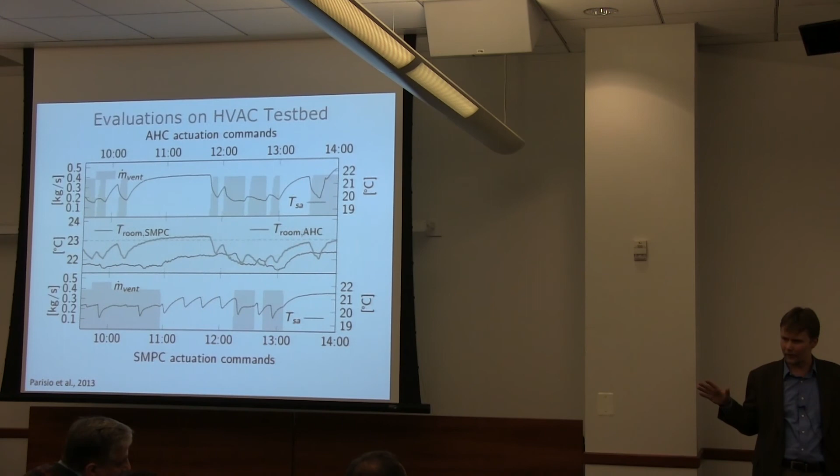We are running more long-term tests now, and that's one reason we developed this test bed with the server. We are storing a lot of data - I had a guy develop a system to store the data securely, and you can hook up to this system online and download data about occupancy and temperature. But we haven't done a full year-long test to compare results yet.

In general, in Sweden, we're coming into the cold season now. In December or January you'll have a much bigger benefit than in June or July, which would be the least energy used. So this would be a bad case to show if I wanted to advocate for the control.

Sure, so is there any pre-cooling done? Like when you take occupancy schedules and external weather into account - do you also do pre-cooling locally, or...

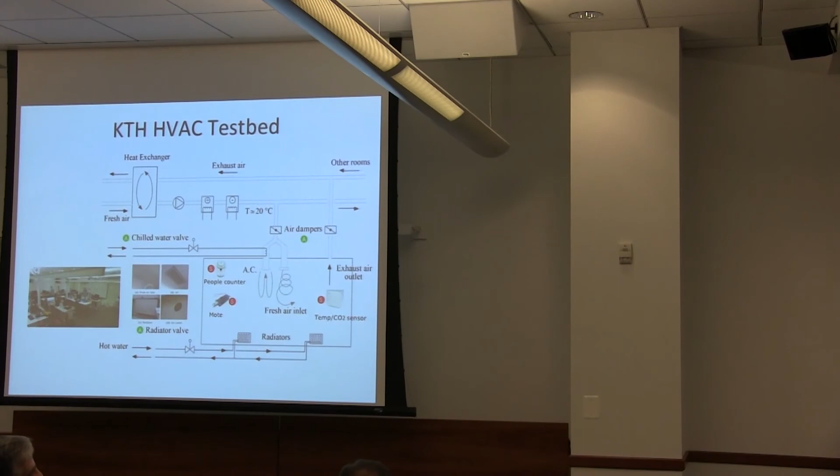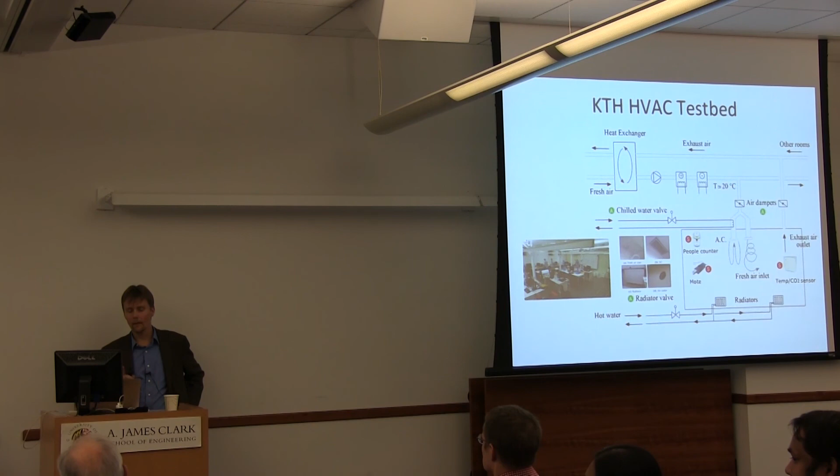If you look at the architecture, this is what it looks like - here you can cool or heat, you see the plus and minus for the air. Actually what I was referring to is that, say nobody is in the building at night, you cool it so much that for the next day the cooling starts at a very low initial set point and you don't require as much.

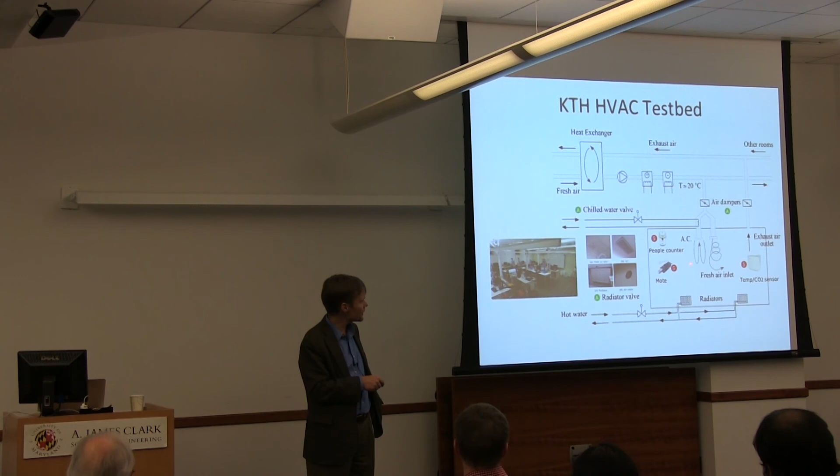You have to separate two things. There's the general cooling or heating of the building - take heating, for instance, you typically don't change the radiator very much. Then when people are in the building, you run the ventilation system. An interesting side effect is that with our system we now detect - at KTH they switch on the ventilation system in the morning at 8 o'clock, and switch it off when the last guy leaves - not the last guy in the building, but the guy who operates the building, at 4 o'clock.

And we run labs in the evening. And actually with our system... Oh, you have seen the data?

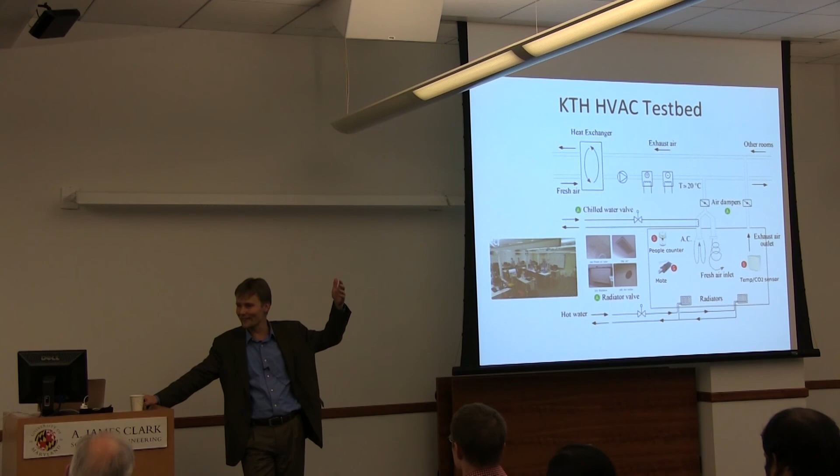Yeah, so I had a couple of people who worked on that send me an emergency email a couple of weeks ago, because they detected that the CO2 level at 9 or 10 o'clock in the evening was more or less at a level in some of these labs which is not good for your health. And it's this type of thing that you can detect when you start storing the data. There's a lot of heuristics that go into how our buildings are controlled, and I'm sure the same happens here with this building.

Yeah, thanks. I want to ask one question, because I have many, but I lost one.

Everything you talked about is on what to do on the cyber side to have a better performance of the cyber-physical side. I'm interested to see if you have any examples where what you learned from these two examples actually suggested an easy change on the physical side to give you benefits. Because that's a very interesting question.

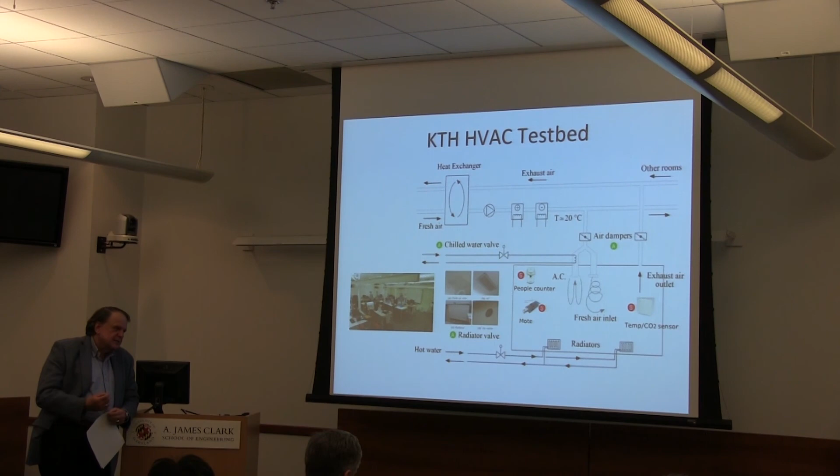Yeah, there are examples, but not many, and I think in cyber-physical systems it's important to find that kind of application, and trust. I can give you a small example that comes out of this platooning.

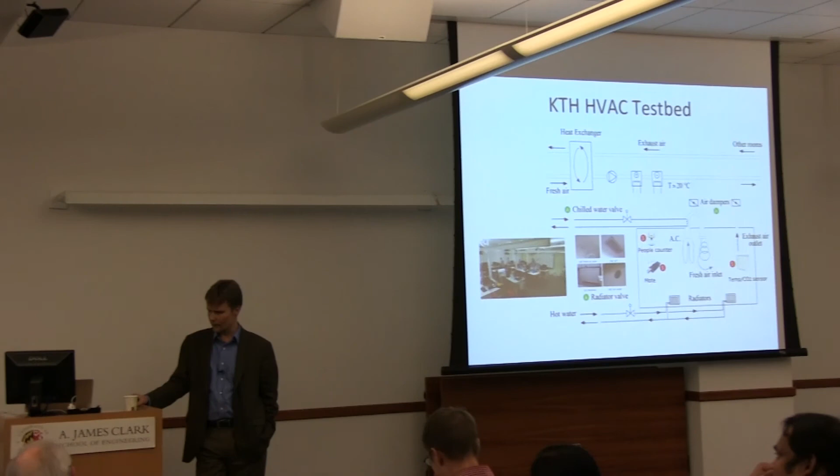If you see a brand new truck today, they have something like fins on the side, I don't know what you call them. And when you think about going into a platoon, you can think about optimizing these things, so to say, the air, the shape of the load, or the carriage, or whatever. You see what I mean, the box there.

So in our collaboration, not what we've been doing ourselves, but what they invest much more in now is doing wind tunnel testing. They actually invested in a new wind tunnel and are thinking about redesigning some of these things according to a future scenario like the one we see.

The current curve, if I'm not mistaken, came from experiments in a wind tunnel here by Jewel Barlow many years ago, where they went from the square shape to the trucks. So the question is, is that still optimal if you have many trucks? You mean the shape of the front of the truck?

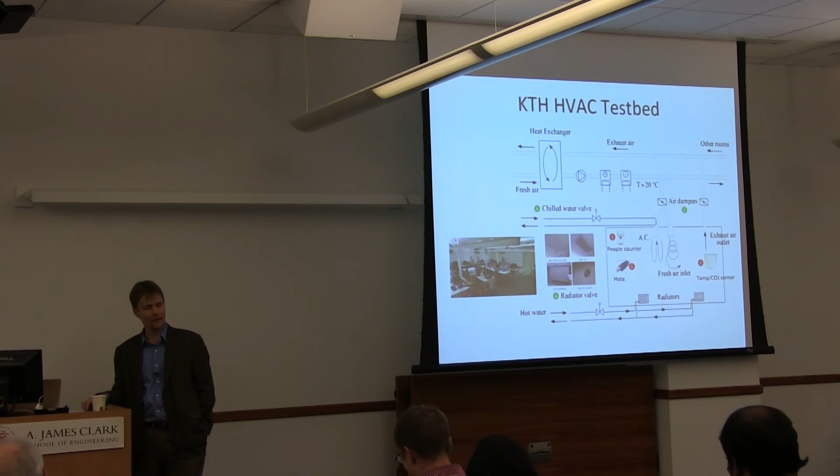Yeah, that's another interesting thing I just learned through this project. Why do US trucks have this thing in the front, while the European ones are flat? That was not the answer I got from the truck industry. No, it's very simple, it's a legal thing.

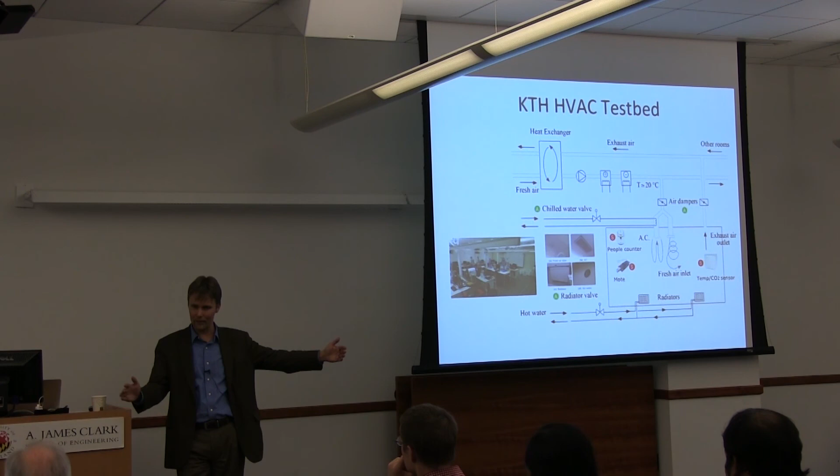What's important when you talk about efficiency is the length of the truck, and you define the length of the truck differently in the US and in Europe. In Europe you could not put that in front, because then it would be included in the length, and the part where you can put cargo would be shorter. So that's why they made it that way.

But they don't separate the engine from what you pull in Europe, so the engine is basically under the driver. Here, right, the trucks have the driving platform separated from, let's call it, the trailer.

But the curve thing they pushed here was the cap that goes on top of the driver cab. At the beginning, if you remember, many years ago it was like that, then they put this curve thing. This was an extensive study done explicitly to minimize drag on individual trucks.

Oh, you mean just that separate piece in between? Okay, I see. And then Qualcomm came in and added the communication for satellites, and they did this OmniTRACS system, so you have multiple utilities in addition to the drag. The question is, if you go to these multiple trucks, is that still a good thing to have?

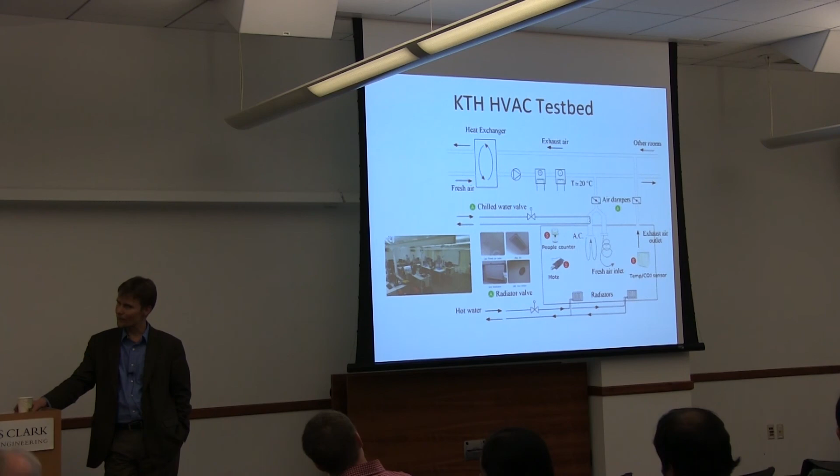Yeah, this is exactly what I meant with these wind tunnel experiments that are being invested in now, thinking about how could you improve this, or is there a better way, because we're starting to talk about things which are almost like a train, right? And how should we now...